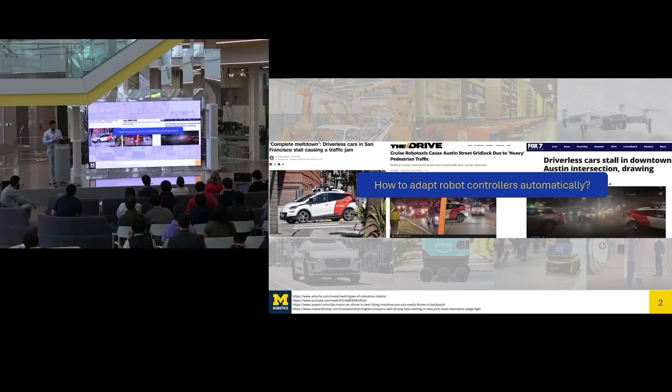But in this particular presentation, I will be focused on controllers, that is the algorithms the robot uses to navigate physically in the environment. In order to improve the capabilities of the robot, I will try to answer the following question: how to adapt robot controllers automatically to remove the conservatism, achieve the task while still respecting all the constraints. So here's an overview of the roadmap and the objective of this presentation and my dissertation. My presentation will be divided in three parts.

Most of my presentation will be talking about a controller, which is simply a function that takes as input the state of the system, which can be, for example, position and velocity, and it outputs the control input, which can be acceleration or turn rate. In part one of the presentation, I will be presenting a generic algorithm to tune the parameters of this controller. The controller depends on some parameter theta, which, for example, can define how aggressive or conservative my controller is in response to certain events happening in the environment.

So consider this video over here, where I have a quadrotor, which is supposed to track the red path while avoiding the white obstacle. Initially, I start with some controller which is too conservative, and then my objective is to eventually adjust the parameters of this controller, which is the amount of repulsion force from the obstacle and the amount of attraction force towards the desired path, to be able to track the path as much as possible without violating the constraint.

So now consider this scenario where we have a car which is trying to navigate through this track. It pings the controller to figure out how the future looks like. And these are the paths. Then I ask the controller to tune the parameters to improve the path. Okay, let me just run it again. Yeah. So now the controller tries to adjust the parameters, and as you see, the paths are getting tighter and tighter so that the car can go faster and navigate the area in less amount of time. This is one of the solutions in which we can optimize the parameters of the controller. However, this is a very ideal scenario, which won't really work in reality.

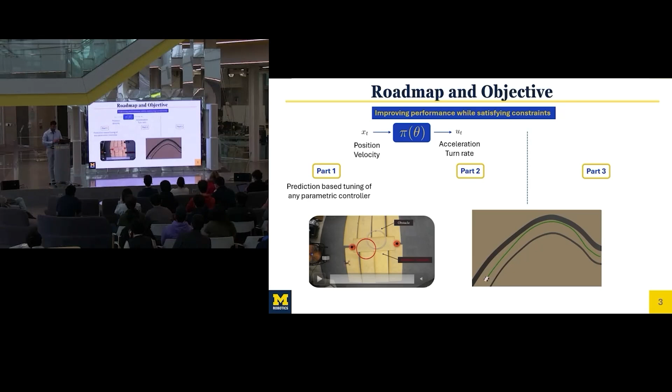The reason being, in reality, there are many things which can be different from the design phase. So for example, we can have uncertainty in the mass. We need not know the exact mass of the cars. It can occupy passengers with different weights. The tires have wear and tear with time, and so on.

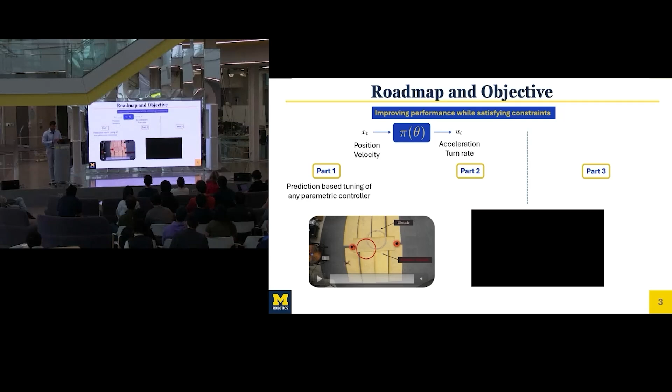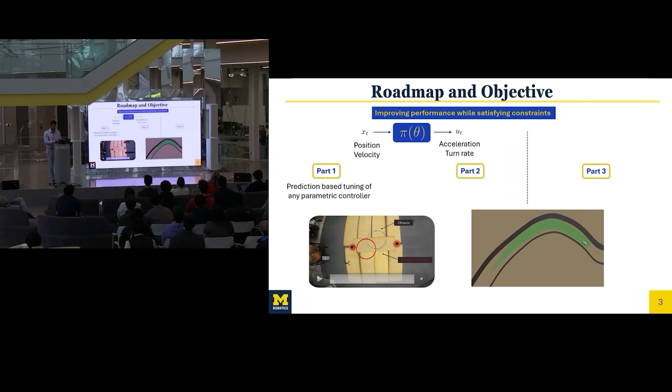So what we would ideally like to do in this particular work is, instead of considering a deterministic future, we want to be able to predict a stochastic future, which means we want to be able to predict all possible positions of the car for a given control parameter. And once you are able to predict possible positions of the car, then we start optimizing the parameters and arrive at a good performing but safe path.

The second part of the presentation, I will be focusing on a very specific type of controller, which is control barrier functions. It can be considered a subset of the first part, but control barrier functions are getting really popular. Control barrier functions basically define a filter in which, if my car is trying to go too fast, the filter will be like, no, stop, you are going too fast, you will collide with the wall. It's not actually a complete controller in itself, but it's only a filter.

Now, issues arise when you have multiple filters acting on the system at the same time. These filters were defined in the offline phase individually without regard to existence of any other filter, but when imposed together, the problem can become infeasible with no solutions. And I will show that by tuning some parameters related to control barrier function, you can actually keep satisfying all the constraints simultaneously.

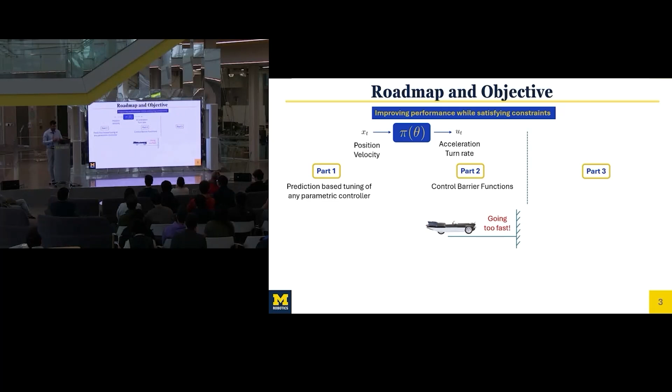In the third part of the presentation, I will try to adapt the controller in a little different way. Instead of considering parametric controllers, I will just say that the controller is unable to satisfy all the constraints, no matter what adaptation law it uses, and no matter what trick it plays. So the only solution in this case is that we start disregarding the constraints because it's impossible to satisfy them.

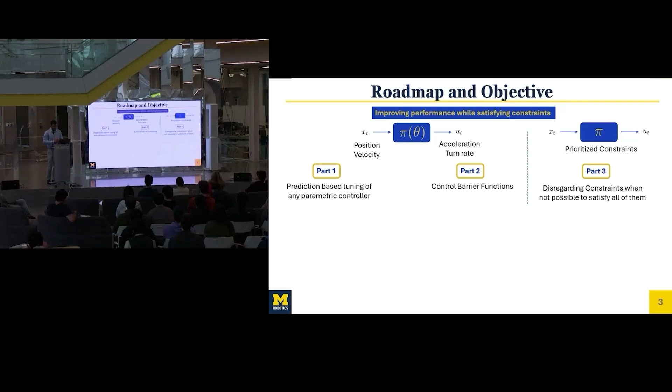In order to do this, I will define a notion of priority, which will be something like additive priority. For example, you want to satisfy as many constraints as possible, if not all. And that's how the presentation goes. So the first problem statement for this presentation is, I want to be able to predict uncertain future and auto-tune parameters for performance and safety.

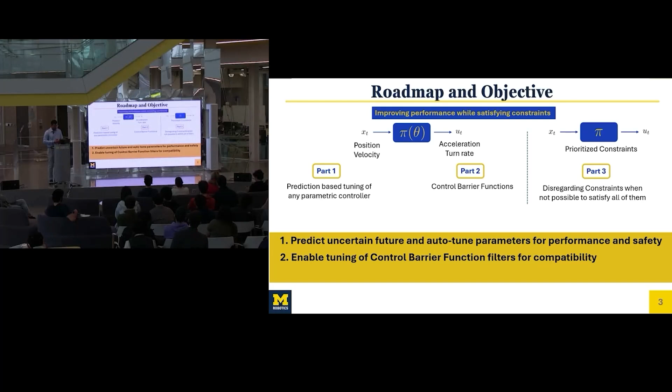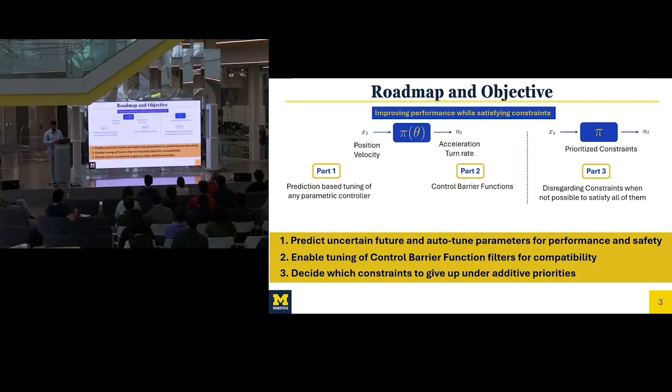The second objective will be enable tuning of control barrier function based filters for compatibility of multiple constraints. And the third objective will be to decide which constraints to give up under the setting of additive priorities when the controller is unable to satisfy the constraints.

One way to categorize the existing approaches is whether they are instantaneous. So these approaches look at what's happening at the moment, and they make an instantaneous decision of what to do. These approaches are usually really fast and efficient. However, they lack in performance over long term, and they cannot usually guarantee satisfaction of constraints.

The second set of approaches we have is optimal or predictive approaches, similar to the example about the racing car I showed you before, in which they predict future as a function of the parameter of the controller, and then they start optimizing the parameter of this controller to slowly shift the trajectory towards better performing paths.

Another way to categorize the existing approaches is whether they are offline, in which everything is pre-computed. For example, the whole paradigm of offline learning falls here. Bayesian optimization is also a very common approach. The second categorization will be whether the approaches are online, which in the context of this presentation simply means whether they are fast enough to be computed in real time as the robot moves around.

And finally, they can be a combination of offline and online approaches in which they use some pre-computed data and adapt the remaining online. In part one of the presentation, I will be proposing an online approach, which is predictive in nature.

So I mentioned that I want to be able to predict these possible positions of my robot, which is like a tube. And this tube won't be a hard boundary, but it will be a set of most likely states of where my robot can be in the future, which means I will be talking in terms of probability. And this is the notation I will be using, which is the state of the robot in the future at the next time step, t+1, is some function of the state of the robot at the current time step, and everything is stochastic.

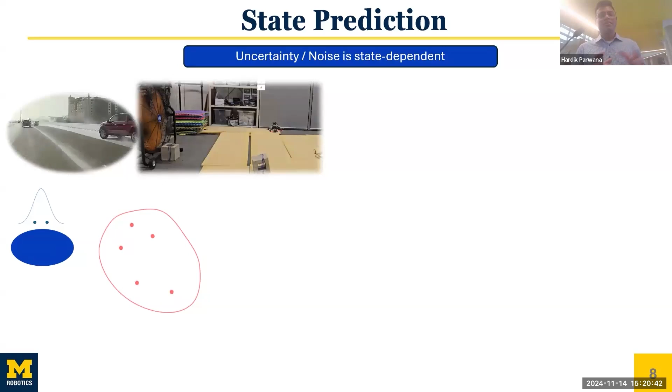So not only does the magnitude of wind disturbance change, our estimate of the disturbance or the uncertainty in our estimates of how the wind affects the quadrotor also changes with the position of the quadrotor. So if we want to predict future under such a model in which the uncertainty is state dependent, each of these points will lead to a different set of futures. And each of these futures will have different uncertainties. Some points will lead to a higher uncertain future, some points will lead to a lower uncertain future. This is what I call the expansion operation.

However, if I keep repeating this over multiple time steps, the method quickly becomes unscalable because the number of points increases exponentially. So in the next step, I propose a compression layer, which simply compresses these 15 points into the best possible 5 points. And the way I choose these best possible 5 points is again through the principle of moment matching. So I'm hoping that the mean, the spread, the measure of asymmetry of these 5 points is as close as possible to the corresponding moments of these 15 points.

So for certain ways of choosing these points, we have really nice analytical formulas, which are also differentiable. And that is what I will be exploiting in my subsequent slides to devise an algorithm that can start tuning the controllers. So before I go to the controller part, here's just a verification or simulation of how my method behaves compared to Monte Carlo.

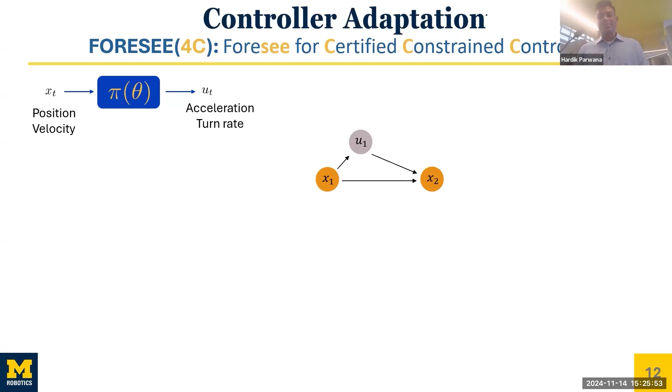I can compute the control input using my controller, and I can compute the next future state X2. And I can keep repeating this procedure to predict more and more states in the future. And in this setup, each of these control inputs was computed using the same controller, which is pi of theta. So they share a parameter theta in common.

The objective for me is to optimize the policy, which means I want to maximize some performance criteria over a time period. A standard way to define the performance criteria is that you define a performance index for every time step and you sum all of them up. So that's what I'm doing over here, where small r is the performance index or criteria per time step.

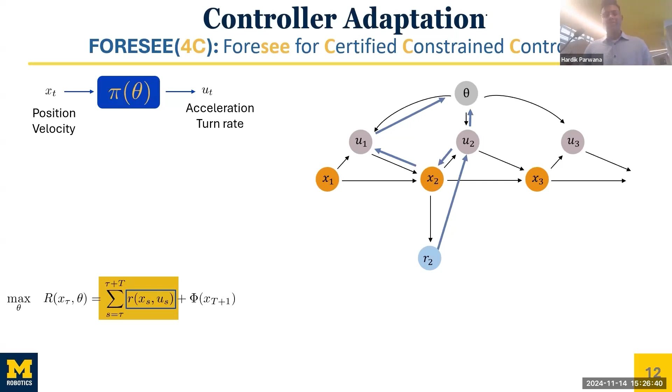Now, this performance index R2 can be computed as a function of the state X2. And then the way R2 is related to the control parameter is through all the edges that connect R2 back to the parameter theta, which is through the state X2, as well as going back to this control input U1.

If there were no constraints in the system, I can simply exploit this relationship with well-defined formulas from my propagation scheme to simply do backpropagation, compute the gradient of the reward R2 in the future with respect to the parameter of the controller theta, and then move theta using gradient descent in the direction that improves the reward. However, I do have constraints in the system.

So a gradient descent that solely focuses on improving the performance of the controller cannot ensure that the constraints can also be satisfied. So here I take inspiration from sequential quadratic programming literature, in which if the constraints are already satisfied, I try to find theta dot, which is as close as possible to the direction in which the reward or performance is improved.

But then I immediately project it to the set, which also satisfies the constraint. So this projection here, in this case, is based on first order approximation of the constraint variable. Theta is the current parameter. This is the gradient of the error, and theta dot is what I want to design.

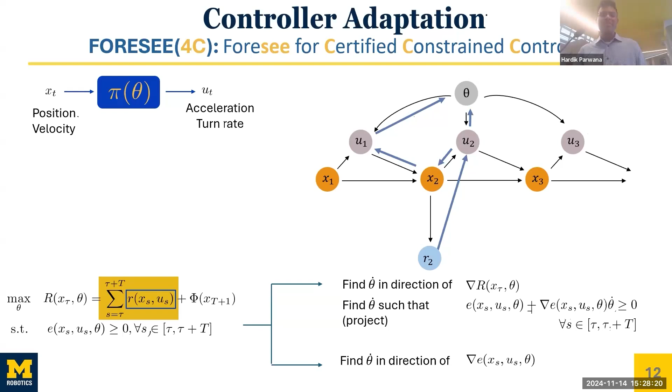In case one of the existing constraints is not satisfied, I let go of my reward because performance is not important if my safety is not satisfied, and then I apply gradient descent to keep improving my constraint. And that's how I devise a real-time scheme, which if the system is safe, it can keep improving the performance while keeping safety. And if the system is going to be unsafe in the future, it'll let go of the reward, and it solely focuses on slowly shifting the trajectories towards the safer and safer side.

So next, I will be showing some experiment results. So this is a quad rotor in which the control input is the thrust, which is the force generated by the rotors of the quad rotor. This thrust is 3-dimensional. This is the standard dynamics of the quad rotor, which simply says that the quad rotor motion is governed by the thrust that the rotors generate and the gravity.

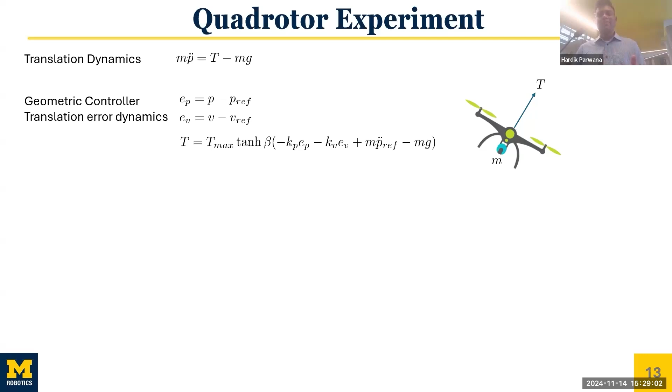Because of this wind disturbance, there is this unknown term, which we don't really know. So what we do in the experiments is that we move the quad rotor around randomly and in some predefined paths. We collect the data of the actual acceleration versus the commanded acceleration. We fit a Gaussian process to learn the difference between commanded and the actual acceleration, and then we use it in our model to predict the future.

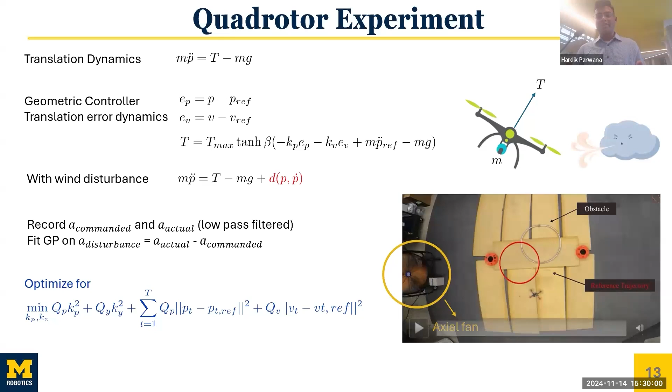And the objective then will be to use this learned Gaussian process to optimize the parameters Kp and Kv of the controller, which govern how fast the quad rotor moves in the environment, to optimize this performance criteria, which is designed to promote tracking of the reference path, the red trajectory over here. But at the same time, we will be using my algorithm to also ensure that it doesn't collide with the white obstacle.

So this is the video I showed at the start of my presentation. This is how my controller behaves initially. It is safe, but it is overly conservative, and it is unable to track the reference path well. With the proposed algorithm, it auto-tunes, and this is the end result that we have.

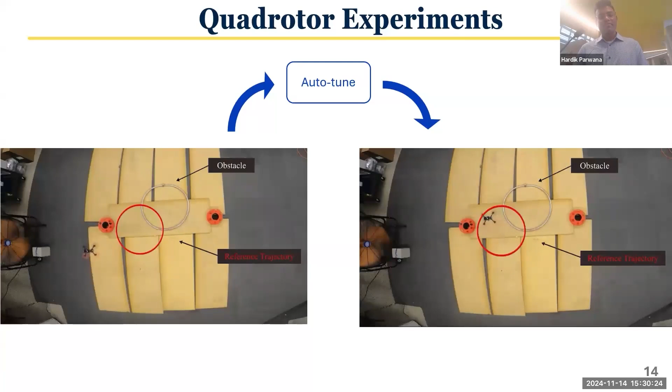So since my algorithm is based on gradient descent, it of course doesn't achieve this in a single iteration. This is how the experiment actually goes. It starts being conservative, and as the quad rotor keeps looping, slowly it gets closer and closer to the reference trajectory while also avoiding the obstacle.

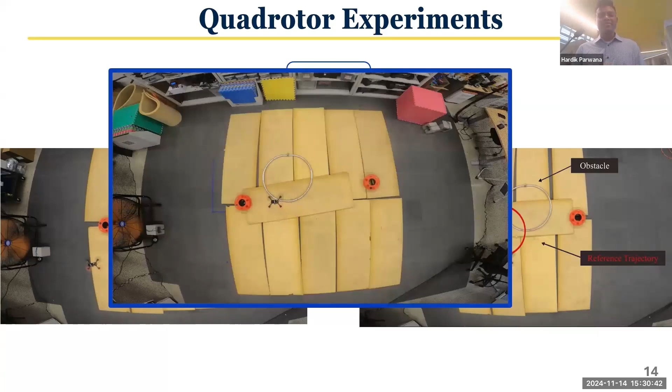But it's also not always good because I'm using gradient descent. It carries the same disadvantages that all gradient descent based algorithms have, which is first, it is sensitive to the learning rate of the gradient descent. I have no idea about how nonlinear my system is. So if I choose a very large learning rate, it may start violating the constraints, as you will see in the second loop of the quad rotor over here.

The second limitation, or I guess not exactly a limitation, but the second uncertainty about my method is that the solution may not be unique. So for example, initially the parameters are bad, so it is violating the constraint. Slowly, it converges to a safe solution in this third loop. But then in the fourth loop, it converges to a different solution.

The difference between the simulation and the experiment still exists because although I fit a Gaussian process on the observed data of the actual versus commanded acceleration in the presence of this wind disturbance, this is a 9-dimensional space in which I have the wind disturbance that depends on the position, the velocity, as well as the attitude of the quad rotor. So it is very difficult to collect enough data that represents all possibilities in the test time.

However, the proposed method is still a way to quickly tune the algorithms in real time. Okay. In part 2 of the presentation, I will be focusing on control barrier functions, which are a very specific type of controller, and I will be applying some methods from part 1 to tune the performance of these control barrier functions. So going back, we have a controller that takes as input the state and outputs the control input.

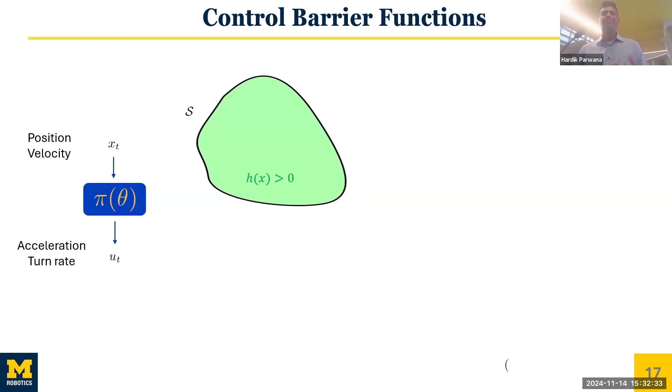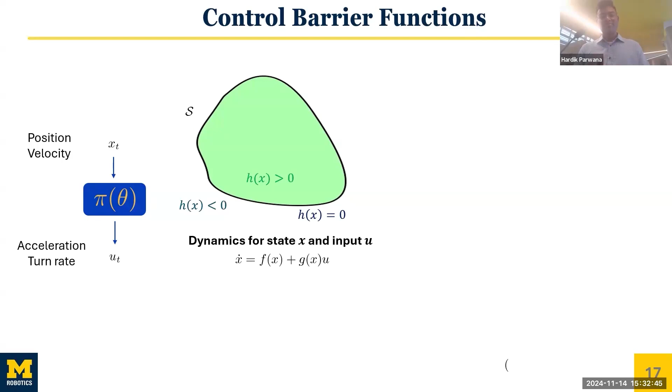In control barrier function, we define a safe set through a function h such that inside the safe set, the function has positive values. Outside the safe set, the function has negative values. And on the boundary, the function has value equal to 0. And then we have some generic dynamics of the system, which is not really important here, but I put the equation just for reference.

And this is the statement of the control barrier function theorem. I will just read it through first. The set S is rendered invariant if h is a CBF, that is, there exists an extended class K function alpha such that supremum of h dot is greater than or equal to minus alpha h, and so on. So what this basically means is that I have a robot and I have a safety constraint to satisfy, which is, in this case, the rover should not collide with the wall over here.

If the distance of the rover with respect to the wall is d, the CBF gives me a condition that puts an upper bound on the maximum possible approach rate of the rover with respect to the wall. So if the rover is approaching the wall at a faster rate than what this condition allows, it will ask it to slow down.

In this particular condition, this factor 2 is something that requires me to know everything about the system. How fast the rover can move, how fast can it brake, if it is approaching the wall at an angle in a 2D space, can it make the turn in time to avoid colliding with the wall, which in a way means that I know everything about the reachability or reachable sets of this rover. So finding a valid factor 2 that works across all the scenarios for all different positions and orientations of the rover is not a trivial problem.

And there are many algorithms to either find these in the offline analysis or tune them online. In general, I will just denote this parameter 2 as nu, and I will focus on how we can design this nu. Yeah, I forgot to mention the simulation, but what control barrier function does is that as the robot gets closer and closer to the boundary of the safe set, it will ask it to slow down or turn away, so that by the time it reaches the boundary of the safe set, it is not going outside.

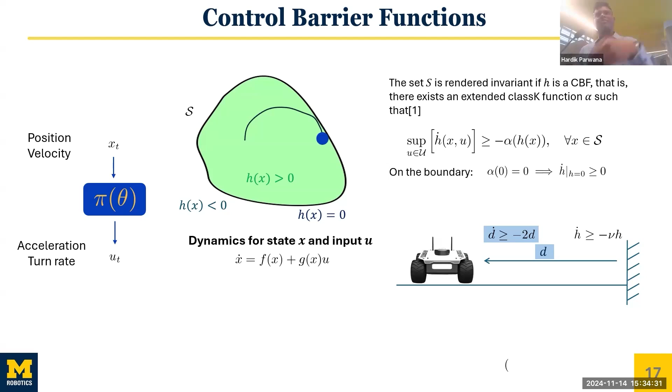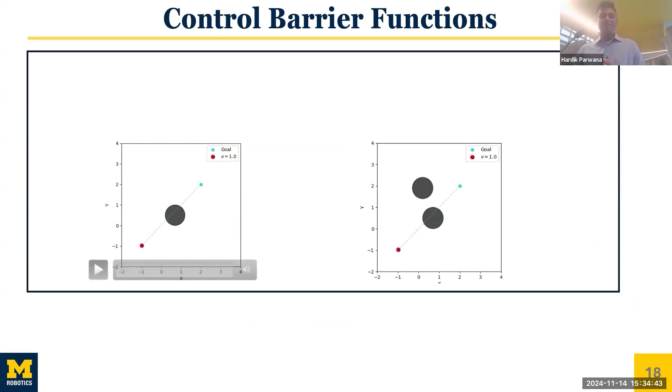So finding this nu is not easy, and it is also not unique. So for example, in this particular case, I show a robot whose objective is to navigate from bottom left to the top right while avoiding this obstacle. These are two different controllers. What this optimization problem here means is that I want to find a control input close to what the user asked me to, but at the same time filter it out minimally if it is not satisfying the safety criteria defined by the CBF. And this is one possible resulting path for the equation that I wrote here.

The green path that you see here that gets even closer to the obstacle is the same filter, but made more aggressive. I can also combine multiple constraints. So I can have optimization problems in which, again, I want to find a control input close to what user wants, but apply two filters simultaneously. So this is one possible path, and this is the other possible path.

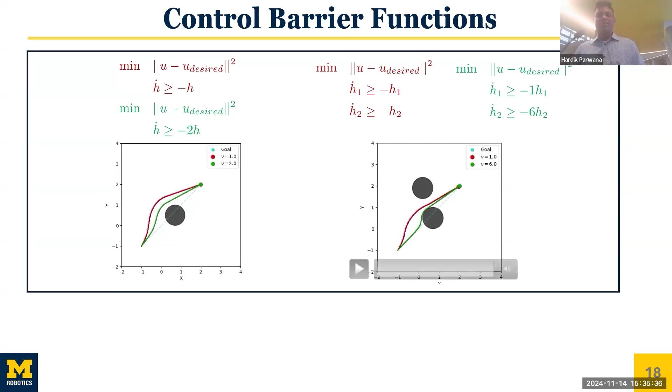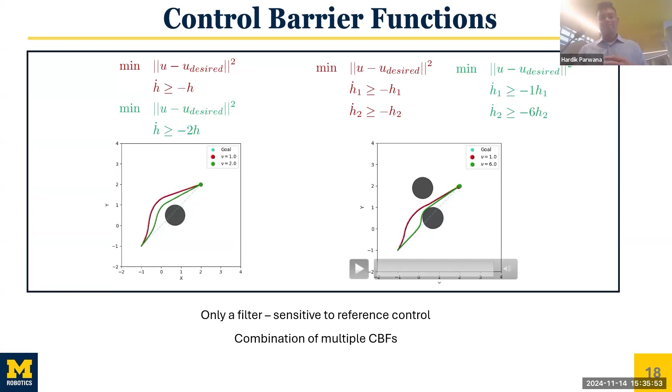In the second green path, I give a higher parameter value 6 to the second constraint, which is the obstacle on the bottom, which effectively makes the second filter corresponding to the second obstacle less conservative and allows the robot to get closer to it. The second and third limitation I would like to mention about the existing CBF approaches is that first, it's only a filter. So it depends on how user defines the desired control input. And second, both the first and the second problem are made more complicated by imposing multiple CBFs together.

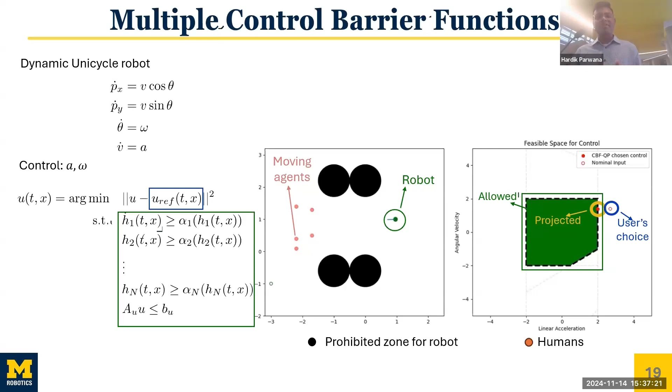And this is the nominal controller that in this particular case the user chooses. I will go over it soon. And this is a run of how the system behaves as the robot moves through the space. Okay, I'll just run it again. So as you can see, because the CBF conditions are state dependent, the green area changes with time, which means the set of allowed control inputs, in this particular case the acceleration and the turn rate of the controller, which are allowed by the CBF conditions, change with time.

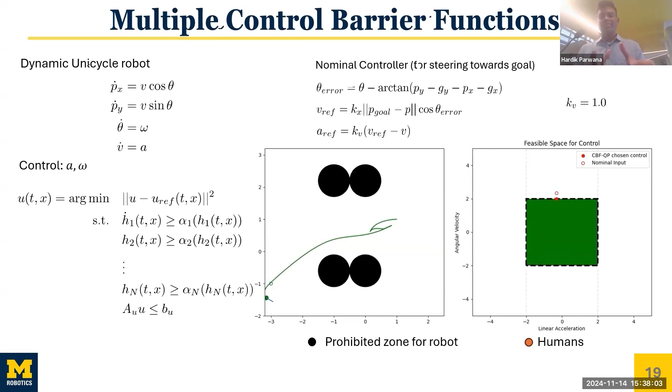So if the CBFs are sensitive to the user-designed control input, we expect how this green area changes to also change with changes in the user controller. So for example, if I were to make the user controller more aggressive, this is how the system behaves. We see that in this case, the robot goes to the bottom and it collides with the obstacle. And the green area also simultaneously goes to 0.

In the third case, the simulation that you just saw, I make the user controller even more aggressive. And in this case, the green area immediately goes to 0. Although in this case the robot is physically safe, because the aggressiveness of the user controller is not exactly compatible with multiple CBF constraints imposed together, the overall problem does not really have a feasible solution.

So these are the three problems which I just mentioned. First, finding the parameter alpha for the CBF is not easy. It is also not unique. Second, it's only a filter, so it is sensitive to the reference control input. And third, imposing multiple safety filters together on a system complicates the above two problems even more.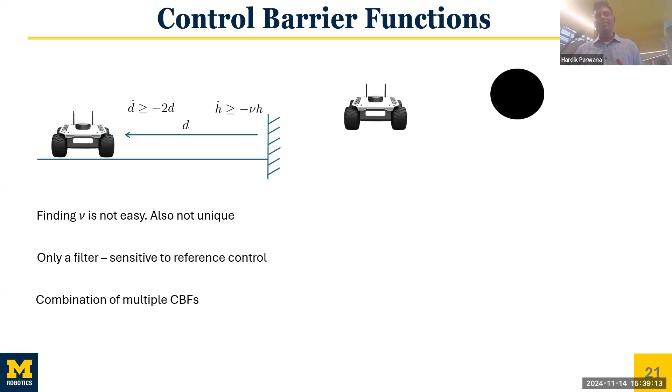So the idea I started proposing in my PhD is that instead of keeping this parameter nu fixed, we can start adapting it online as the robot navigates through the environment. What this allows us is that for every possible safe trajectory of the system, we have a customized response of the controller, which is what I call rate-tunable CBFs. So initially, we had a system with the constraint h dot greater than or equal to minus nu h, which is the filter that the CBF condition imposed.

And then we have a state x that goes into the controller, and the output is the control input. This translates to the new system in which we design a new policy that takes as input the state x as well as the parameter nu, and it outputs the original control input which the robot needs, for example the linear acceleration and the turn rate, and it also outputs the rate at which my filter should change its aggressiveness or conservativeness.

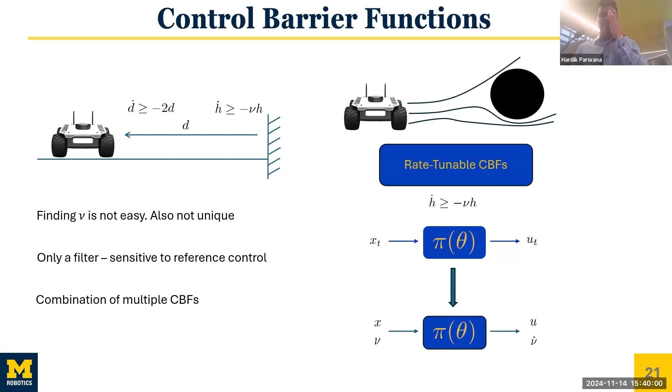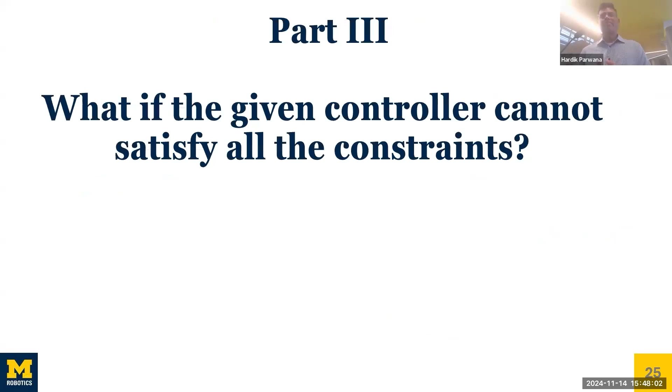Okay, that brings me to the third and final part of my presentation and the last chapter of my thesis, which is: what if the given controller cannot satisfy all the constraints? So in the presentation so far, I proposed some methods to adapt the parameters to be able to satisfy all the constraints simultaneously for all times. But what if, even with all my tricks, I'm unable to do that? So the only solution that remains is we need to start removing constraints from the optimization, because it's an impossible scenario for the given controller.

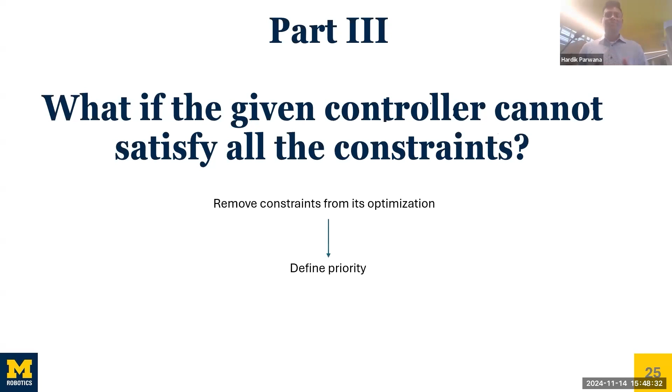If I want to remove constraints, it means I need to define some metric which allows me to remove the constraints. And in this presentation, I will be calling it priority. There are different ways to define priorities, and I will be working under the setting in which we have additive priorities. So for example, we want to satisfy as many constraints as possible. No single constraint has absolute priority, but they might have weights or they might have equal weights. And what's important is the summation of those weights.

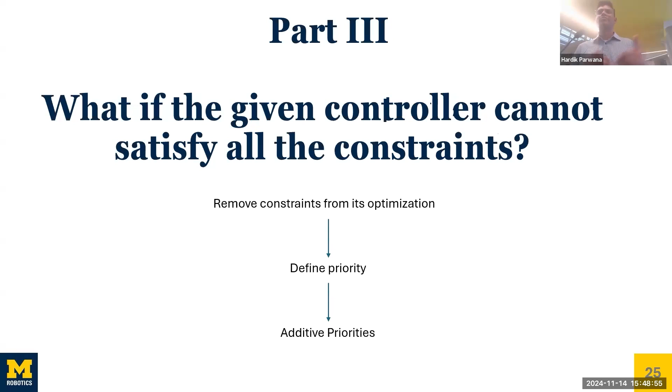So again, I have a controller that takes the state as an input and outputs the control input. These controllers are given by some optimization problem, which again, like before, have some objective function, for example, to choose a control input that is close to what the user wants. And then they have some constraints which filter out this control input.

And the way we use them in practice is that we ping this controller at every time step. So at t equal to 0, the controller outputs something valid, and my system moves forward. At t equal to 1, we again ping the controller, and so on. And then we observe suddenly that at the 4th or the 5th time step, we ping the controller, and it suddenly returns infeasible, that is, there is no feasible solution left for this particular problem. So then the question is which constraints to remove and how to remove the constraints.

So I also make 2 different classifications of the type of constraints. From now on, I will be dividing my constraints into 2 sets. The first set is what I call soft constraints, which the controller is allowed to remove. The second set of constraints are hard constraints, which the controller is not allowed to remove, and it must respect these constraints at all times. So the objective will be to start removing soft constraints to ensure satisfaction of hard constraints at all future times.

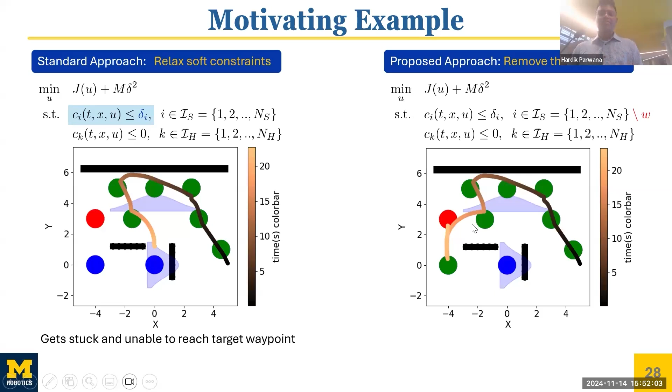In contrast to this, the proposed approach is that we completely remove the constraint. Sorry for this typo here. So instead of adding the slack variable, we simply remove the constraint completely. In this case, it doesn't even try going to the last waypoint over here, and therefore it is able to reach the final red target waypoint in time.

The second most common approach is defining absolute priorities, which is not the setting I'm considering, but there are several papers which define that this is the most important constraint. So that reduces the problem to a hierarchical procedure in which a control input is designed to first ensure that it can reach the final target waypoint, and then it starts going backward, and it tries to also go to other neighboring waypoints as long as it can still reach the target waypoint in time.

The setting that I'm considering is additive priorities, which has been a common topic of research in optimization literature outside of dynamical systems. So if I have been given an optimization problem which is infeasible, that is, it does not admit a solution, the objective is to remove the minimum number of constraints to render the remaining problem feasible. This problem is known to be NP-hard, which stands for non-deterministic polynomial hard problem, which means it takes polynomial time just to check if the solution is actually a solution.

So that doesn't really tell me much. So hopefully this will help everyone understand, which is if I were to give you a Sudoku and I give you the solution of the Sudoku, how long will it take for you to verify that my solution is actually the solution? In order to do that, you will have to plug in each and every value that I tell you. The minimum number of operations you will do is number of rows times number of columns, which is total number of cells, which is a polynomial number of the system parameters.

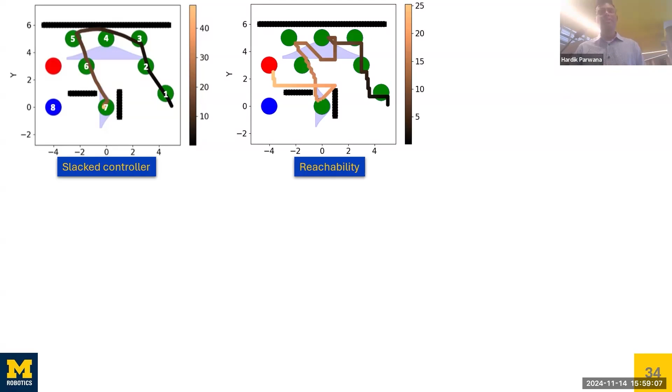In the second approach, we performed an exhaustive reachability search. So we make a tree of all possible paths that the robot can take, and then find the shortest possible path which satisfies as many waypoints as possible and also reaches the red waypoint in the end. Third, we do an exhaustive search over reduced controllers. So I use the same CBF controller, an optimization problem with multiple safety filters. And at each time step of the simulation, I explore every single possibility of which safety filters I want to keep and which I want to remove from my optimization. So this is an exponential search. And this is the best case solution I got for a CBF-QP controller. So this tells me that the maximum waypoints I can hope to reach is 5 before I reach the final target waypoint. And the ideal would be to achieve this performance with the proposed heuristics.

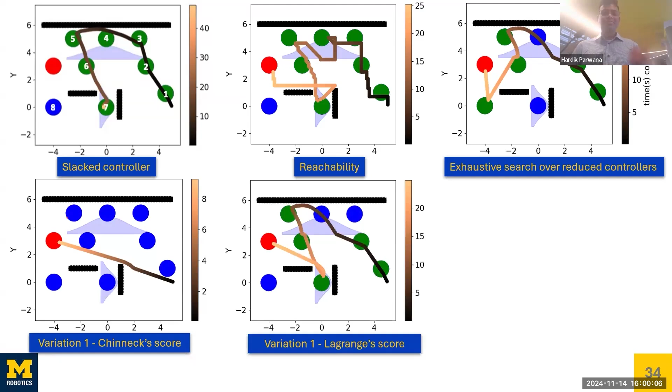The next algorithm is the Chinneck score. And Chinneck's algorithm is a standard way to solve this particular NP-hard problem in the optimization literature, which we then adapted to this particular problem. And we see that it performs very poorly. It is unable to go to any of the waypoints, and it simply drops all of them. We then apply the proposed score in a very specific way to decide which waypoints to drop, and it performs really well. It is actually able to go to 5 of the waypoints. We also proposed another variation of our algorithm, which uses the same heuristic Lagrange multiplier-based score, but in a more efficient algorithm. In this case, it performs poorly compared to variation one, but it is still able to reach some of the waypoints.

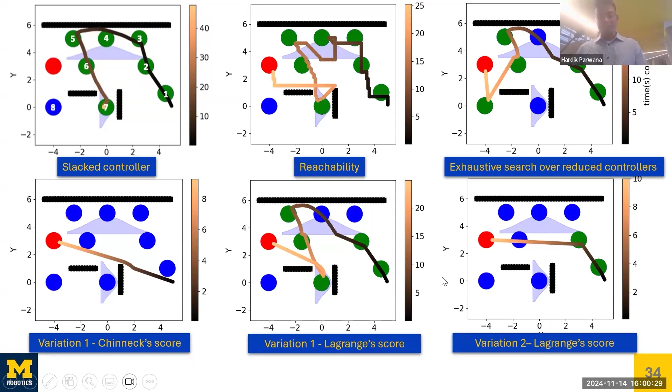So in conclusion, I started this presentation with a method that predicts the state, and then it starts tuning the parameters of the controller to slowly improve how my future trajectories are going to behave. This method was presented in chapter 5 of my thesis. I didn't really go in the exact chapter order for this presentation.

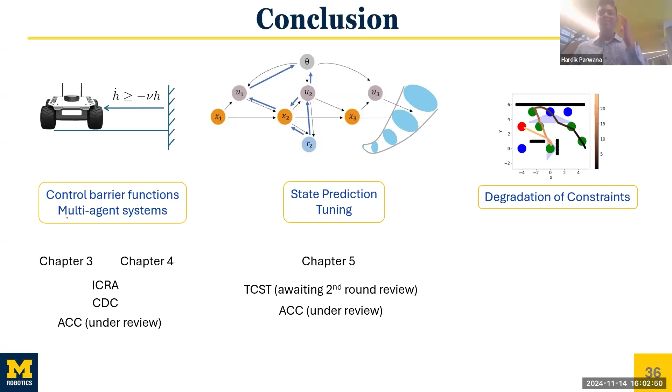And finally, I wanted to start thinking about the question: what if the controller simply cannot maintain all the constraints? In this case, which constraints should we drop under the setting of additive constraints, where, for example, we want to satisfy as many constraints as possible? This was included in chapter 6 of my dissertation.

And this is the list of publications. And yeah, thank you so much.

So I guess it's time for the emotional speech. First, I would like to thank my committee members, Professor Panagou. We have been working together for almost 4.5 years now. I think we had a rough start due to COVID, like you mentioned. I remember that we finally started meeting in person sometime towards the end of my second semester. And when I started meeting you in person, I was like, whoa. I can just take a pen, use the whiteboard, and we can start interacting and writing together. This is so much more productive than what we had been doing for the past 7 to 8 months, because at that time we were just not used to Zoom meetings and tablets and so on.

When I came here, I was far from being an independent researcher, and I had a lot to work on in my approach to solving a problem. And while my problem statements in the end turned out to be very different from what we initially planned for me, I think they were very motivated by your ideas on working with CBFs, as well as the topic of graceful degradation of constraints that I believe you have been wanting to work on for years. It's been a long journey, and despite many challenges in work and personal life, I'm grateful that you kept with me so that I can reach this point, irrespective of whatever happens in the next hour.